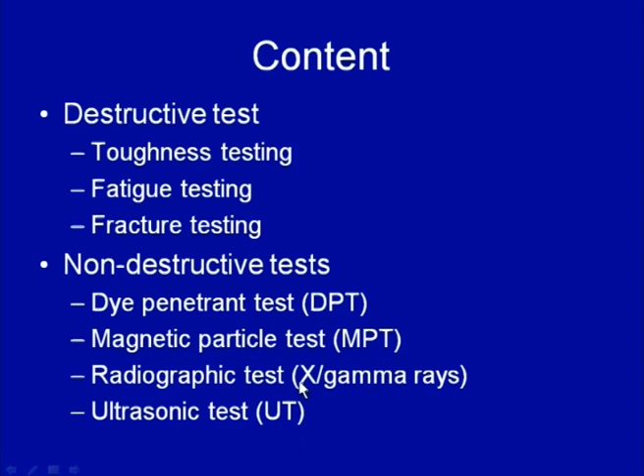Then we will take up the non-destructive testing methods, which will include dye penetrant test, commonly known as DPT, then magnetic particle test known as MPT, and radiographic test based on either X-rays or gamma rays, and then ultrasonic tests. This is one of the very commonly used tests nowadays for assessing the presence of subsurface defects and locating them.

Starting with the toughness test: engineering components are frequently designed with a variety of features like holes, keyways, slots, etc., and these components are expected to perform during service with these features present.

However, presence of special features like notches, keyways, or holes brings in very rapid changes in cross section, which increases stress concentration, and many times under dynamic load conditions these become points of weakness, sometimes leading to failure of the component during service.

Since in actual practice engineering components many times have a variety of notches, and are frequently subjected to dynamic loads, meaning loads whose magnitude is fluctuating, or subjected to a very high rate of loading during service.

To withstand this, a material should have a reasonably good degree of toughness, so that it can withstand service even under high rates of loading conditions, when the component has a variety of notches or variation in cross sections.

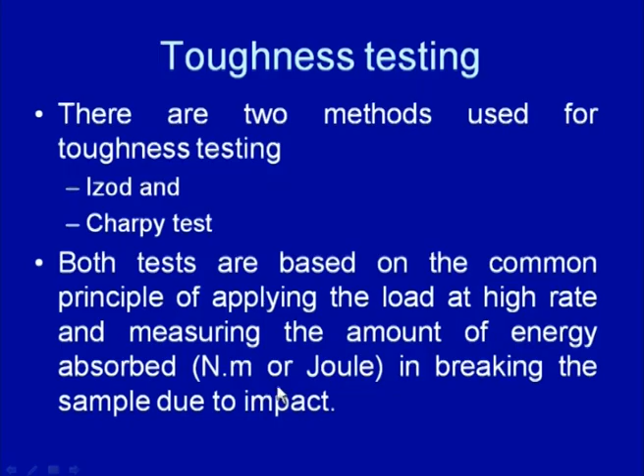Because engineering components are frequently subjected to impact load conditions during service, there are two methods commonly used for toughness testing: IZOD and Charpy test. Both are based on the common principle of applying the load at a high rate and measuring the amount of energy absorbed for breaking the sample due to the impact. So basically the impact load is applied and it is observed how much energy the sample absorbs for fracture to take place.

That energy is expressed either in terms of joule or Newton meter. For this purpose, one common principle is used: a pendulum with a heavy hammer-like object is raised to a high level so that it has potential energy, and then it is dropped under gravity conditions. It hits the sample, and the energy is absorbed by the sample in this fracture process. The amount of energy left with the pendulum as it swings to the other side decides how much height it will cover.

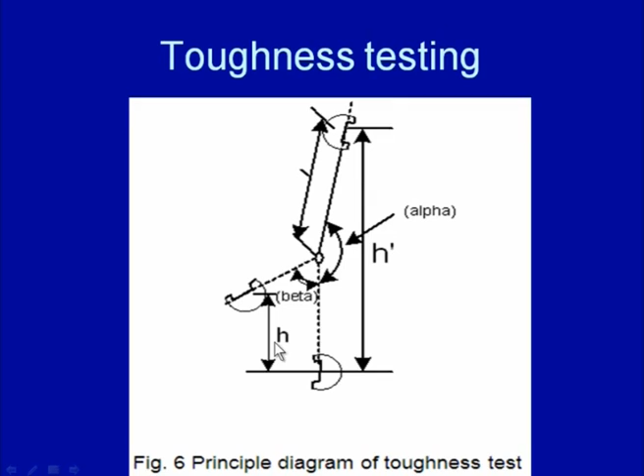Say initially the height of this pendulum is h dash, and when it comes down and hits the specimen, some amount of energy is absorbed. Whatever energy is left with it, the pendulum goes to the other side, say to a height of h. The height difference indicates the amount of energy it has absorbed in this fracture process.

So these two methods, IZOD and Charpy impact test, largely use the same principle: a pendulum is raised to a higher level and then allowed to fall and strike the specimen to be tested, and the amount of energy absorbed in this fracture process is recorded to determine the toughness of the material.

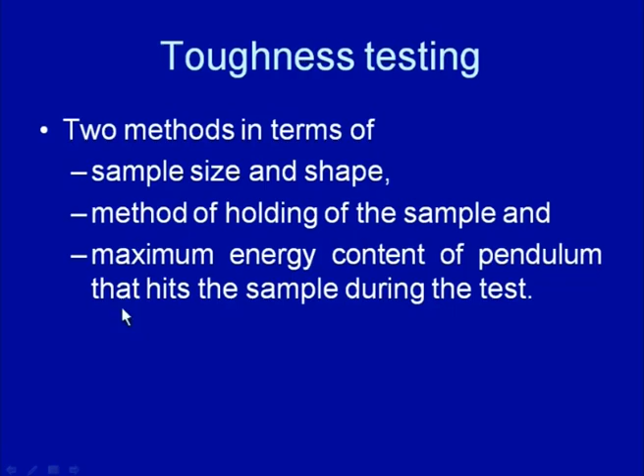However, the placement of the specimen, the type of specimen, and the energy that the pendulum has are different for the two methods. So the two methods differ in terms of sample size and shape, the method of holding the sample, and the amount of energy that the pendulum contains before impacting the specimen.

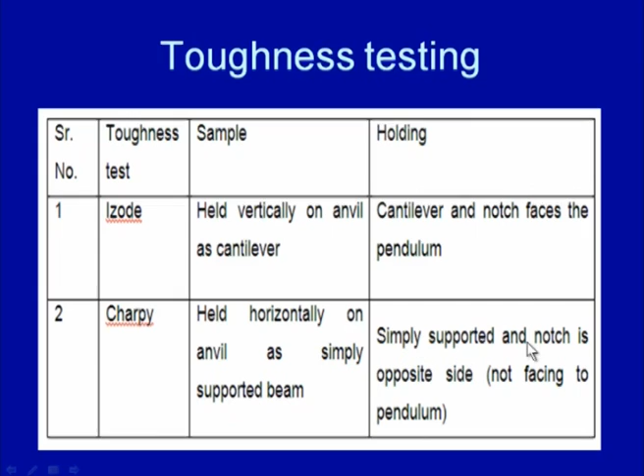In the IZOD test, the specimen is held vertically in a cantilever manner, while in the Charpy test, the specimen is held horizontally on the anvil as a simply supported beam. In the IZOD test, the cantilever and the notch face the pendulum when it hits the surface. In the Charpy test, with the specimen simply supported, the notch is on the opposite side, meaning the pendulum hits the specimen from the back side of the notch, not from the facing side.

This is the difference that exists between these two methods. Just to show this, the schematic of the two specimens and their dimensions is shown here. The first shows the Charpy test, where the specimen to be tested is placed on the anvil in a simply supported manner, getting support from both ends, and then the pendulum's striking edge hits from the back side, and the amount of energy absorbed is recorded in this test.

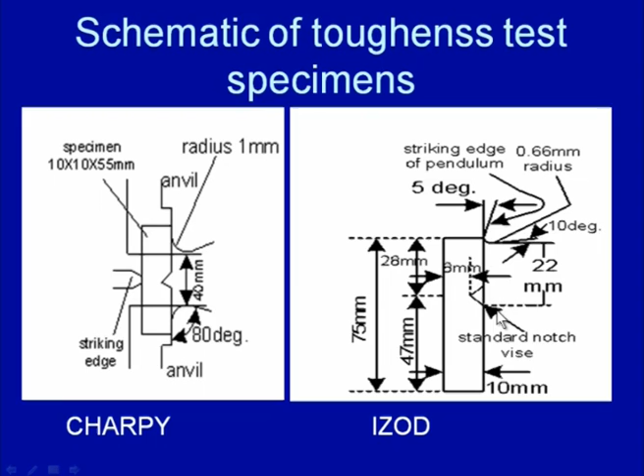In the IZOD test, the specimen is held like a cantilever, and the pendulum hits from the face side of the notch. These are the different dimensions of the specimen commonly used for the IZOD test.

In both cases, we find the toughness of the material in terms of the energy absorbed by the notched material, measured in Newton meter or joule. Higher the amount of energy absorbed in this fracture process, greater is the toughness of the material, indicating that the material can withstand impact load conditions without failure.

If the material requires very less amount of energy for fracture to take place, that indicates the lower toughness of the material and poor ability of the material to withstand impact load conditions.

Once the impact toughness test is completed, the results are reported in terms of the amount of energy absorbed by the specimen in this process, or amount of energy absorbed per unit cross sectional area.

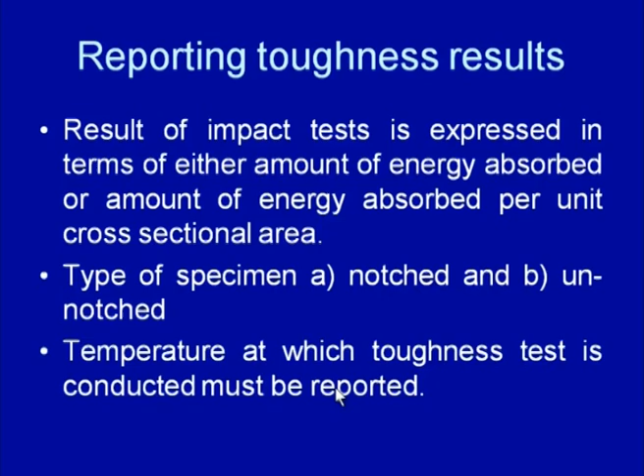It is also mentioned what type of specimen was used, whether notched or unnotched, and the temperature at which the toughness test was conducted, because temperature significantly affects the toughness value of the material. It is also important to mention which method of test was used, whether Izod or the Charpy test.

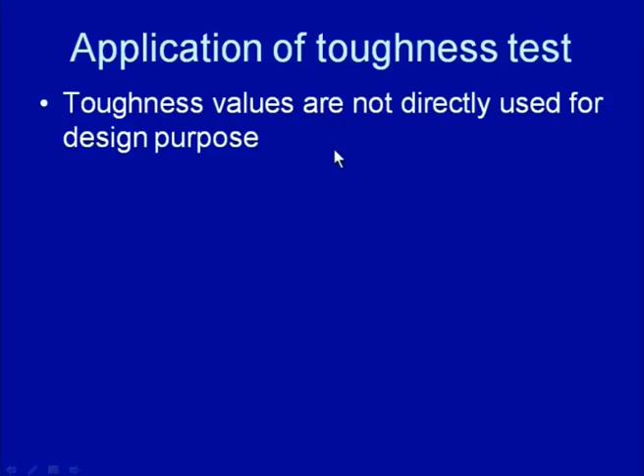After conducting the test, we get some value of toughness in terms of the energy absorbed by the specimen during the test, but these values are not used directly for any design purpose. They simply indicate the ability of the material to withstand impact load conditions.

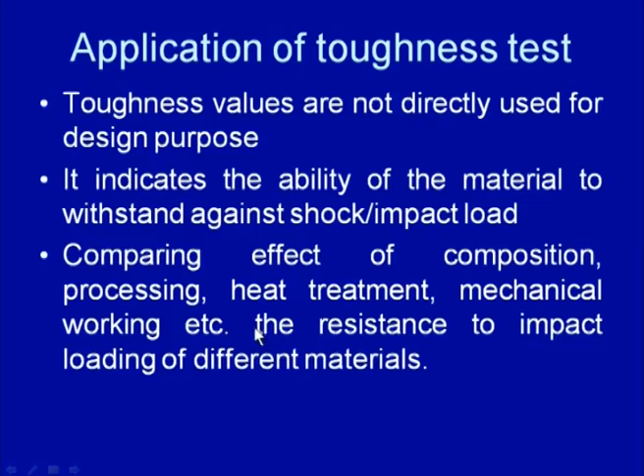This test can be effectively used to see how variation in composition, processing method, heat treatment, or mechanical working affects the ability to withstand different impact load conditions. So this toughness test can be used to compare how the material's ability to withstand impact load is affected by changes in composition, processing, heat treatment, or mechanical working.

Another important test is the fatigue test. In real life, most engineering components are subjected to fatigue, because the magnitude of the load and its direction keeps changing during service.

The application of fatigue load on an engineering component reduces its life very drastically. To assess how a material or weld joint will perform under such load conditions, fatigue behavior is investigated, and it is studied in two ways.

First, to identify the endurance limit, meaning the maximum stress at which it can withstand an infinite life, typically more than 2 million load cycles.

So the first fatigue test is conducted mainly to see the endurance limit, which indicates the maximum stress at which it can withstand an infinite life, mostly considered as 2 million load cycles, or alternatively, the number of load cycles it will withstand.

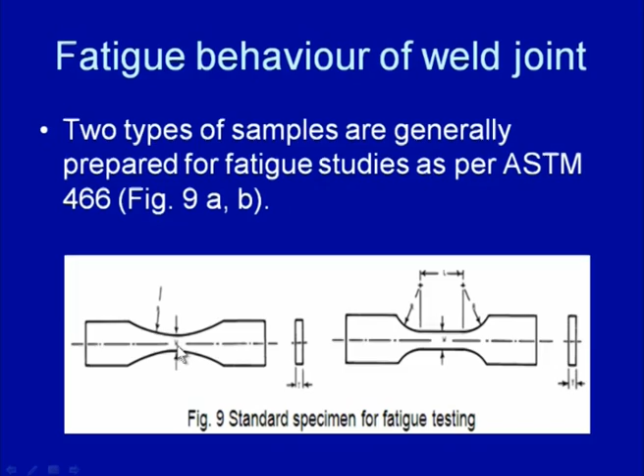In the reducing radius cross section specimen, the stresses are always localized in the minimum cross sectional area zone, and this is mostly kept in the weld region, which helps assess the fatigue performance of the weld joint itself.

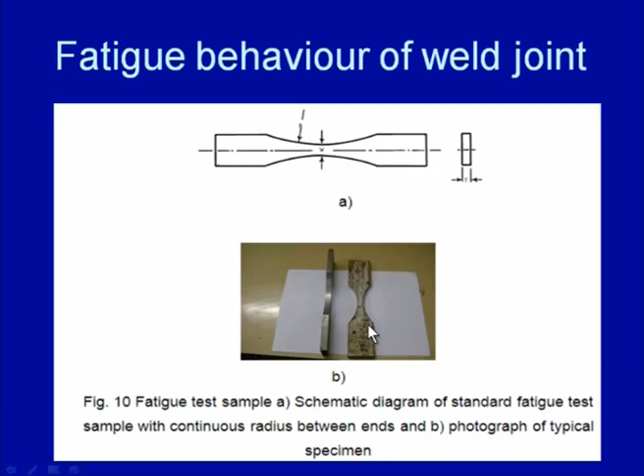These are the typical specimens used for conducting the fatigue test. Here is a schematic diagram showing the reduced radius specimen, and this is a real photograph showing the reduced radius specimen used for fatigue testing.

When the fatigue test is conducted, it is important to see what loading conditions are being used, since the fatigue performance is appreciably influenced by the various parameters related to this test.

First, we see what stress ratio is being applied, meaning what is the minimum and maximum stress. The ratio of the minimum to maximum stress gives us the stress ratio, and the commonly used stress ratios are 0.1 or 0.5.

Then the type of stress being used is established, meaning what type of stress load cycle is developed for conducting the test. It could be tension to tension, where stress varies from some minimum tensile value to a higher value, or it could be reverse bending, tension to compression, or zero to tension.

Then the maximum stress magnitude is identified, and stress range is identified from the difference of maximum to minimum stresses. The rate at which load is applied is indicated as loading frequency. Depending on the system being used, we can use loading frequencies of 5 hertz, 10 hertz, or 20 hertz, based on the capability of the test system.

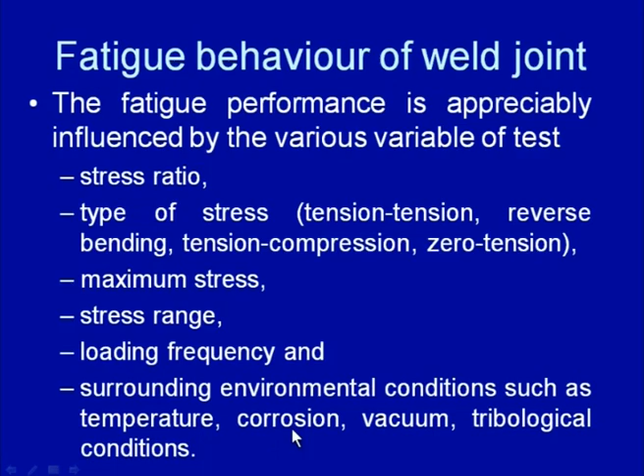If any special kind of environment is applied for conducting the test, such as low or high temperature, corrosive atmosphere, vacuum, or tribological conditions like fatigue under fretting, abrasion, erosion, or cavitation conditions, then depending on the conditions required, a suitable environment is developed and reported.

For conducting the fatigue test, suitable stresses are developed and applied onto the specimen as per requirement. It is common to conduct a rotary bending test, which develops tensile and compressive stresses in each load cycle, while axial stresses are also used, applying either zero to tension or tension to tension stresses.

Apart from the rotary test, axial loading is commonly used for conducting the fatigue test. For axial loading, we first conduct the tensile test of the specimen so that we know the yield strength and ultimate strength of the material.

To understand this, we will go through the step-by-step methodology. Say we have a weld joint for which this is the weld joint specimen, a tensile specimen that has been developed, and at the center, here, this is the weld region.

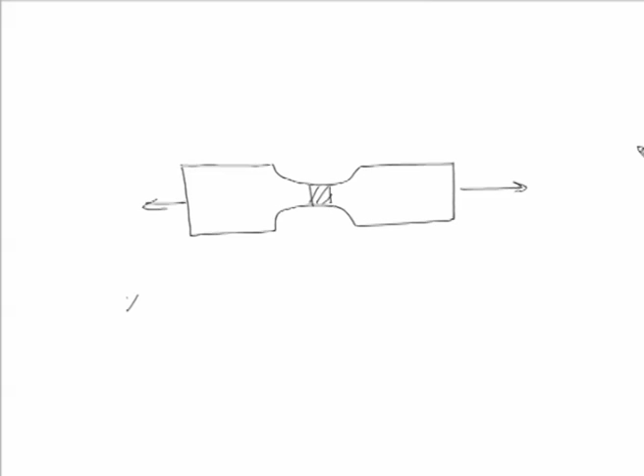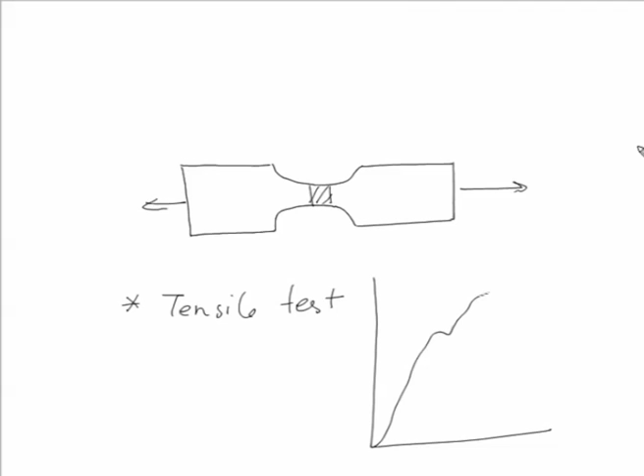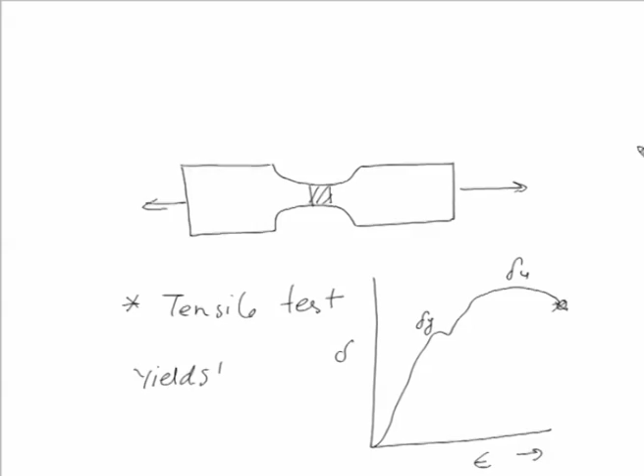The first step is to conduct the tensile test of the specimen. When the tensile test is conducted, it gives us a stress-strain curve of this kind, which gives us the yield stress, ultimate stress, and the percentage elongation corresponding to this point. This yield stress information is used for conducting the fatigue test.

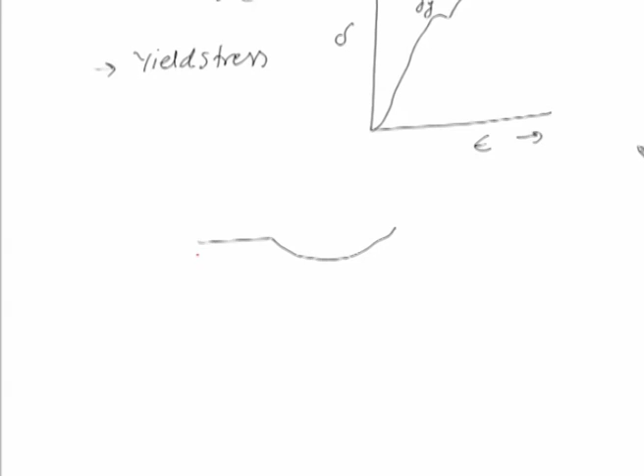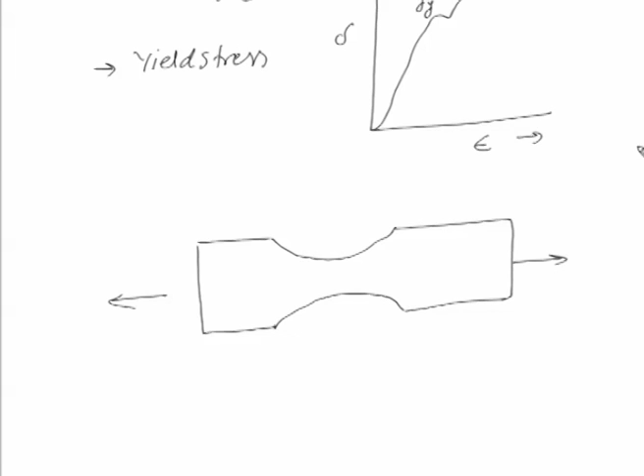Another specimen, with a reduced radius cross section, will be developed and subjected to the fatigue test, say in the case of axial loading, depending on the kind of stresses to be developed, ranging from zero to some maximum, or some minimum to maximum.

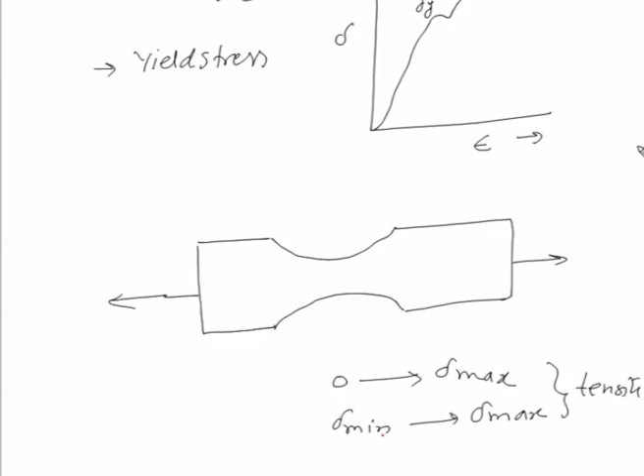So all these can be of tensile kind, or these can have minimum compressive stress and maximum tensile stress, and their values can be identified. This is how we identify the kind of stress and the maximum stress to be applied, and based on this we apply the loading conditions.

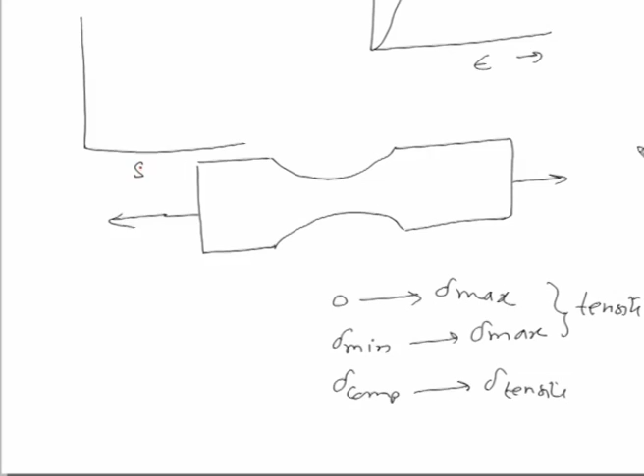As far as development of the S-N curve is concerned, we need to plot the relationship between the number of load cycles a specimen can withstand, and here we can have either maximum stress or stress amplitude. It is common to use S for stress amplitude, which is half of the stress range.

We start by putting in maximum stress to the tune of 0.9 times the yield stress. So starting with this, 0.9 maximum stress corresponds to 0.9 times the yield stress, and that will be taken as the first test. This will consume, or use, very few load cycles.

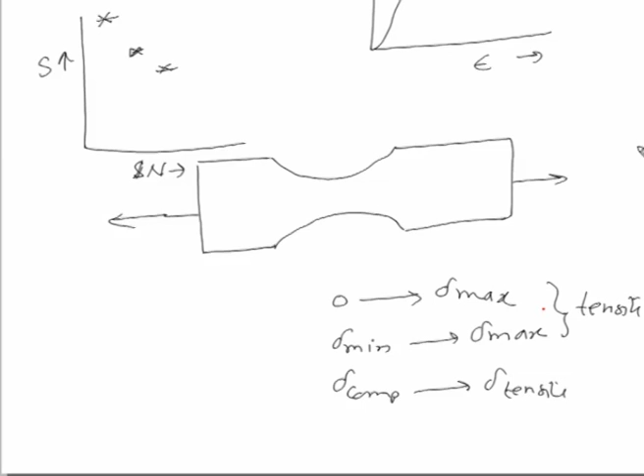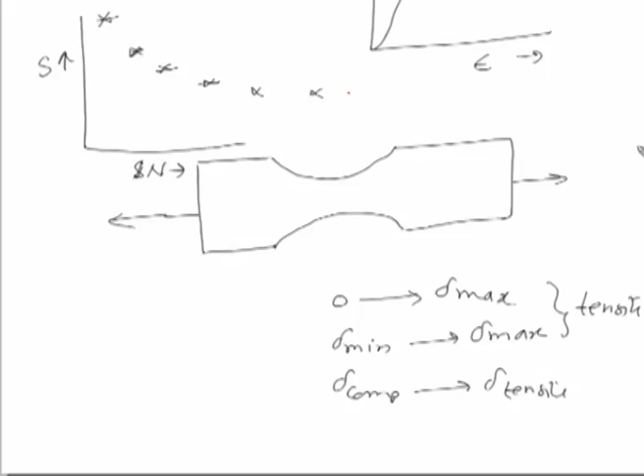Thereafter, we will be conducting the test at 0.8 times of the yield stress, which will take somewhat longer, and we keep on reducing further to 0.7 times of the yield strength, then 0.6 times of the yield stress, and so on. We find that after reaching somewhere in the band of 0.4 to 0.5 times of the yield stress, in case of ferrous metals, the number of load cycles becomes the endurance limit. So we can show it like this.

The first test is conducted corresponding to 0.9 times the maximum stress, which should be about 0.9 times of the yield strength, and thereafter depending upon the kind of stress ratio being used. A stress ratio can be 0.1 or 0.5.

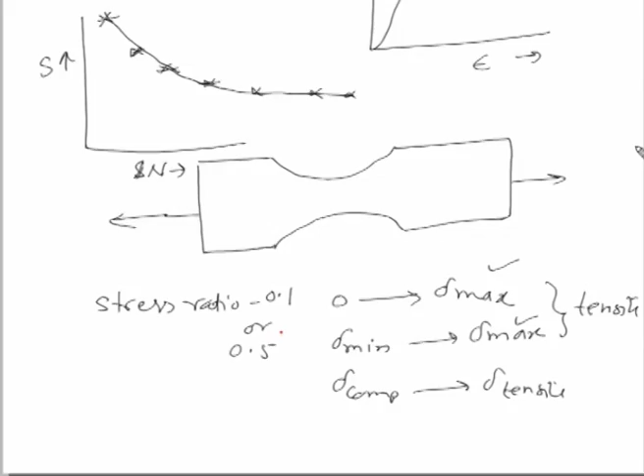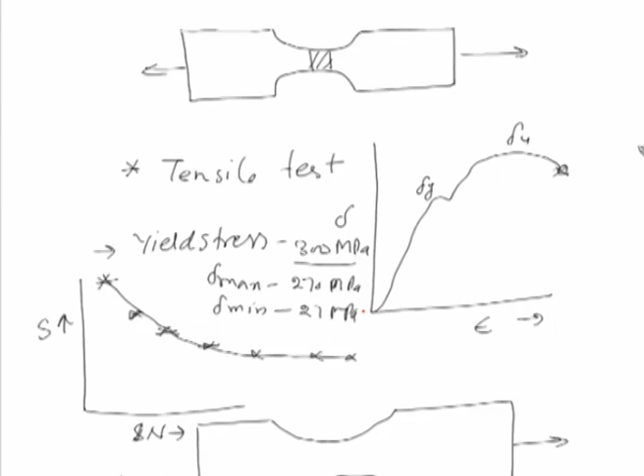If you are taking a stress ratio of 0.1, it indicates that the maximum stress will be about 10 times the minimum stress. Say if the yield strength comes out to be 300 MPa, then to start with, the sigma max we can take as 270 MPa, and sigma minimum using the stress ratio will be 27 MPa. So if it is tension to tension, the minimum stress will be 27 MPa, maximum stress will be 270 MPa, and accordingly the stress range can be calculated. This is one way which can be used for conducting the fatigue test.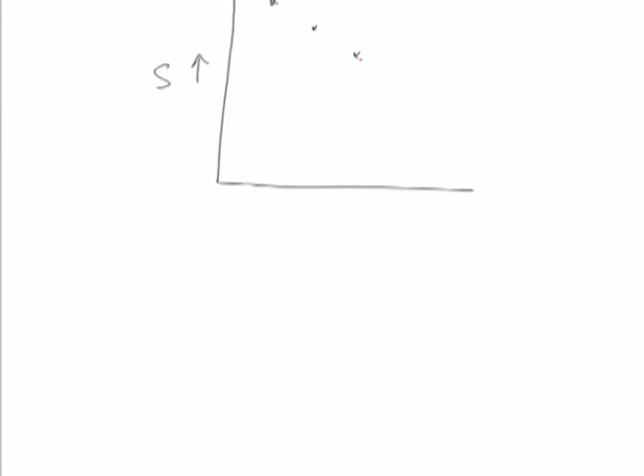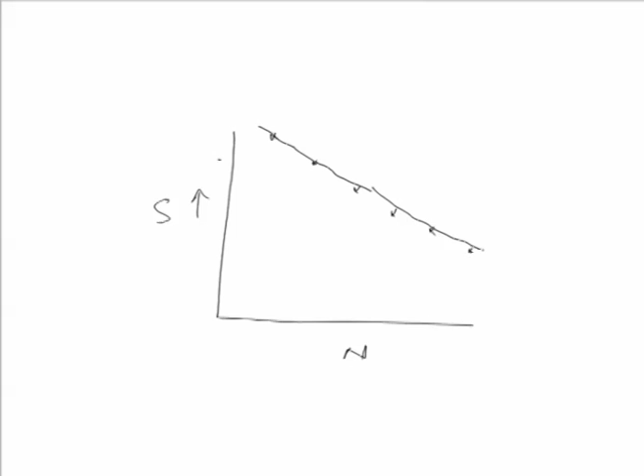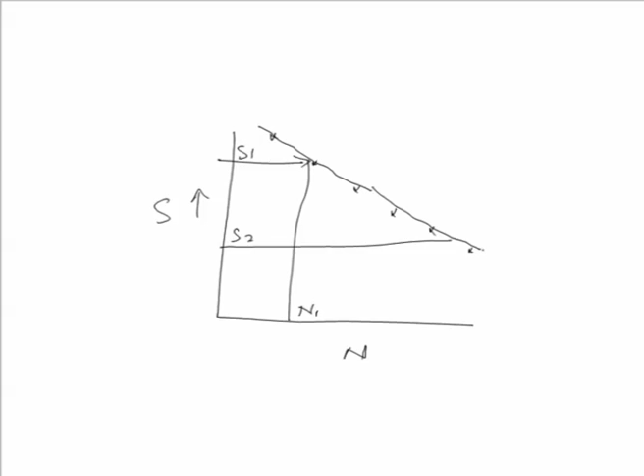There is another way, when the material is a non-ferrous metal system like aluminum, where we will not get a clear cut endurance limit. For conducting tests on those metal systems, we correspond to different stress amplitudes and conduct the fatigue test, and in that case we keep on continuously decreasing the fatigue load cycles without getting a very specific and clear cut endurance limit. So for a given stress amplitude value we get one value of life - for S1 stress amplitude we get N1 life, and if S2 is the stress amplitude then we get another N2 life of the component under fatigue conditions.

So these are the two ways through which the fatigue behavior of the material is studied, especially with respect to life. One is the endurance limit, the other is the number of load cycles a system will withstand for given loading conditions.

Another important aspect related to fatigue behavior is the study of crack growth rate. We know that fatigue failure takes place in three stages: crack nucleation, crack growth, and catastrophic failure. The first and last stages - nucleation and catastrophic failure - form about 15 to 20% of the total fatigue life cycle, while 80% of the fatigue life is composed of the second stage, where stable crack growth takes place.

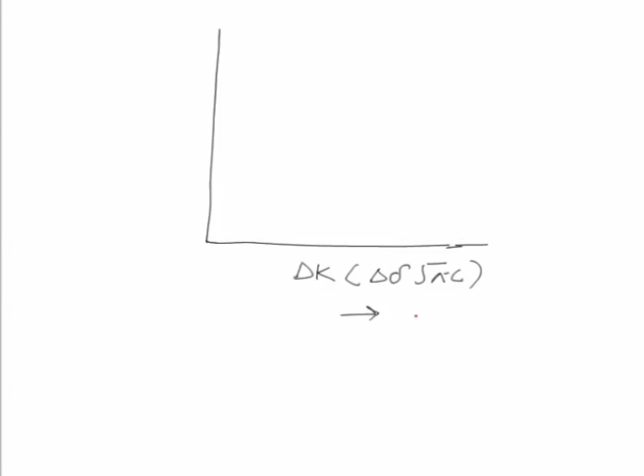So basically we try to study the crack growth behavior of the material under fatigue conditions. To study the fatigue crack growth rate, we use delta K, the stress intensity factor range, indicating the stress range - that is delta sigma, the difference of maximum stress and minimum stress - multiplied by root pi C. This gives us the stress intensity factor range, where C is the half crack length for internal defects, and the full crack length for external discontinuities and defects.

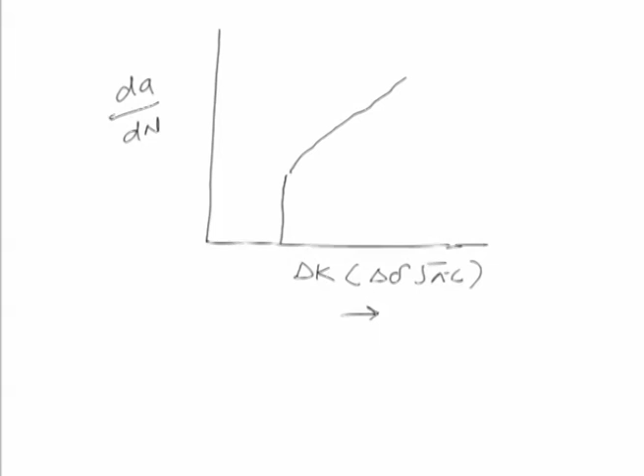The stress intensity factor range is put on the x axis, and on the y axis we put da by dN, which indicates the crack growth rate. We get a curve where there is no crack growth rate - the crack, even if present, is non-propagating - and when the stress range increases beyond a certain value, we get a curve where very stable, smooth crack growth occurs.

The crack growth rate increases continuously, and then in the third stage it increases further. So this is the first stage, and this is the second stage, where the crack growth rate versus the stress intensity factor range has a largely linear relationship. In the third stage, the crack growth rate increases at an increasing rate, clear from its positive slope, while in the second stage the slope largely remains constant.

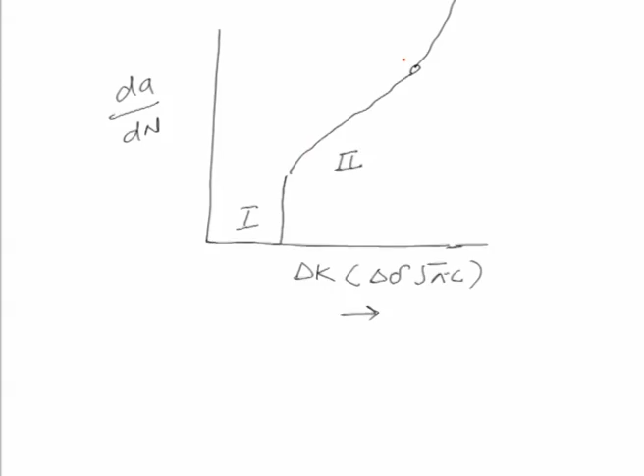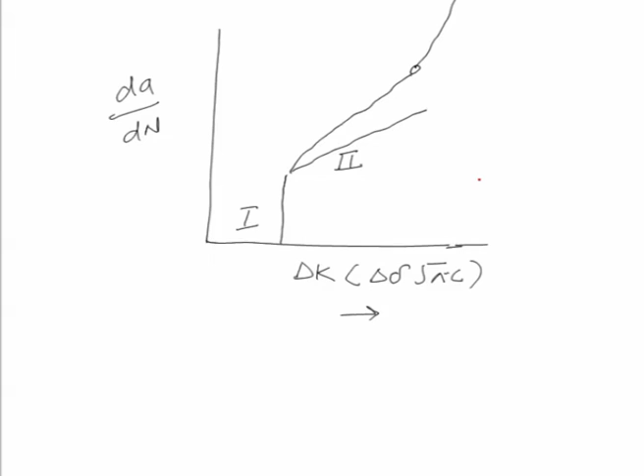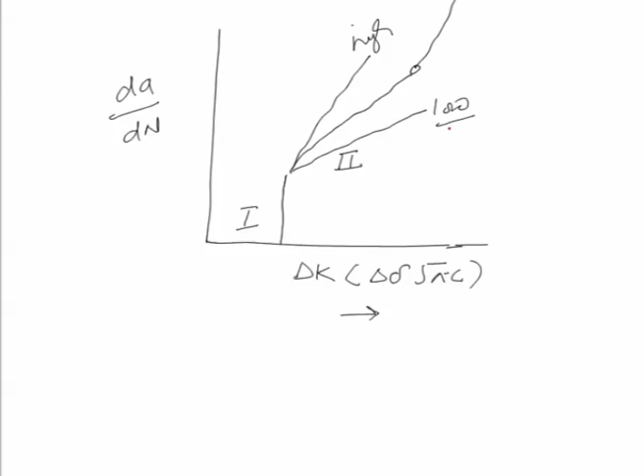For different metal systems, this slope is found at different angles. For metal systems where the slope is low, the crack growth rate occurs slowly and the fatigue performance will be better compared to material systems showing higher crack growth rate. So here this is low crack growth rate, and this is high crack growth rate, and high crack growth rate materials show poor performance under fatigue load conditions.

This is another zone where fatigue crack growth related studies are conducted. As far as fatigue behavior is concerned, the important aspects include plotting the S-N curve, meaning stress amplitude, maximum stress or stress range, versus the number of load cycles, called the S-N curve.

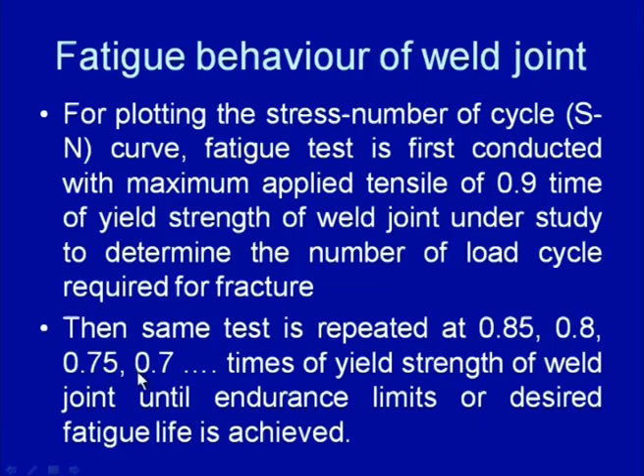The fatigue test is first conducted with the maximum applied tensile stress of 0.9 times the yield strength of the weld joint under study, to determine the number of load cycles required for fracture. The same test is then repeated at 0.85, 0.8, 0.75, 0.7, 0.65, and so on at different maximum stress levels, and the number of load cycles required for failure is identified.

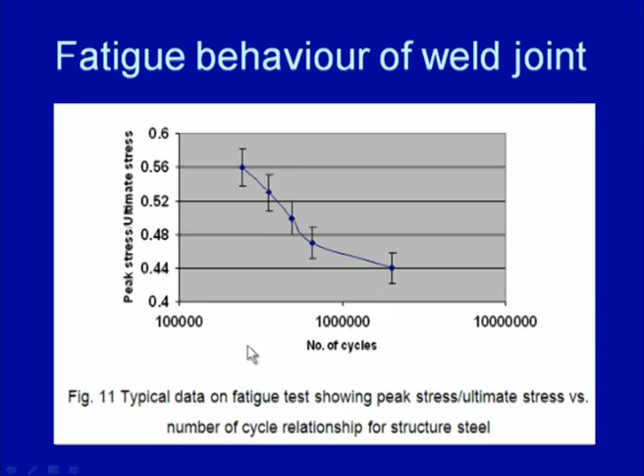We then develop a plot between stress range, stress amplitude or maximum stress on the y-axis and the number of load cycles on the x-axis to obtain the S-N curve. These S-N curves can be plotted on linear scales or log scales.

The fracture toughness test is another important test commonly used for measuring the resistance to fracture of the material. It indirectly shows that if a crack is present, under what conditions it will start growing. So the resistance to crack growth is measured in terms of fracture toughness, which shows resistance to fracture or resistance to crack growth. This is known as fracture toughness.

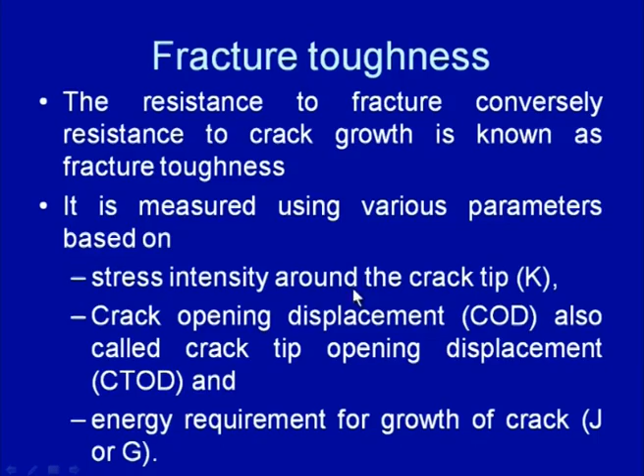It is measured using various approaches like the stress intensity factor around the crack tip, commonly known as the stress intensity factor and denoted by K. Then there is the crack opening displacement, called COD or CTOD (crack tip opening displacement), and the energy required for growth of the crack, using the J or G parameters.

We will be talking mainly about the stress intensity factor parameter, which is used for plane strain conditions, especially when the yield strength of the material is high and ductility is very limited, while the crack opening displacement and energy-related parameters are used for somewhat ductile materials.

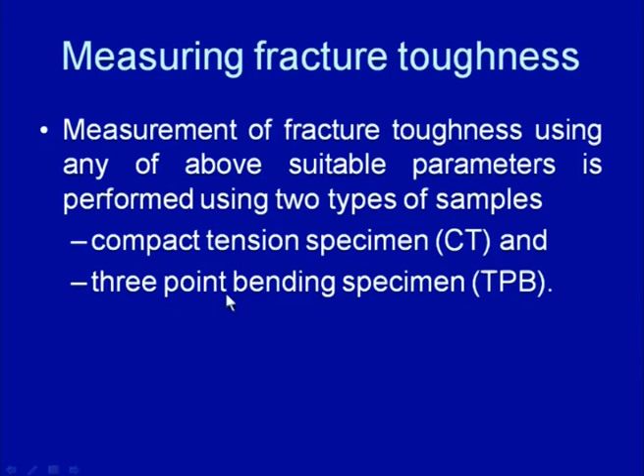For measurement of fracture toughness, two types of specimens are used. One is called the compact tension specimen, commonly known as the CT specimen, and the other is the 3-point bending specimen, abbreviated as TPB.

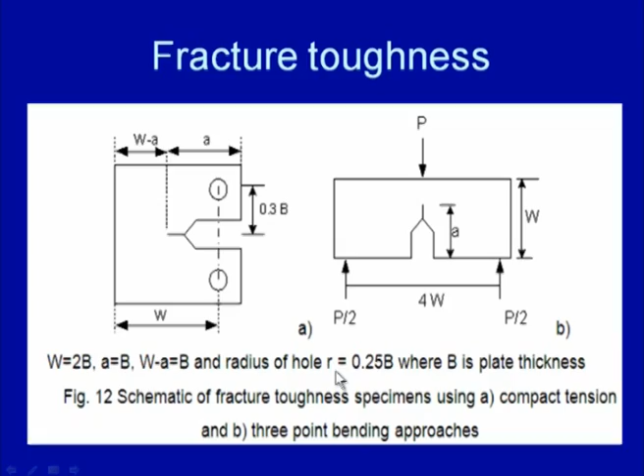In case of the 3-point bending specimen, the specimen is simply supported and the bending load is applied from the top like this, and this hole which is made is about 0.25 times the plate thickness.

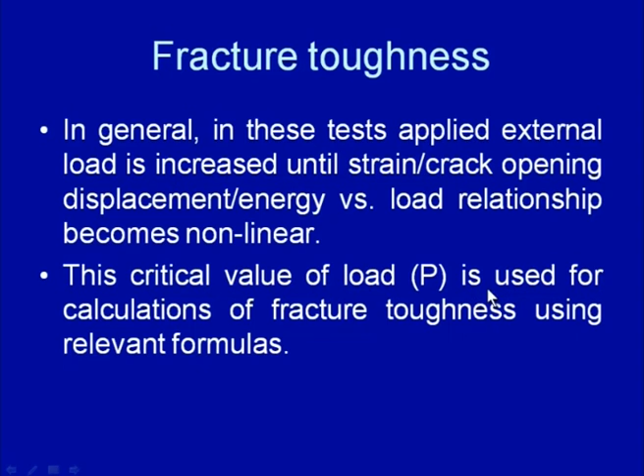In general, these tests are conducted by applying external load, and it is increased until the strain, crack opening displacement, or energy versus load relationship becomes non-linear. That critical value of load where it deviates from linearity is used for calculation of fracture toughness using the relevant formulas.

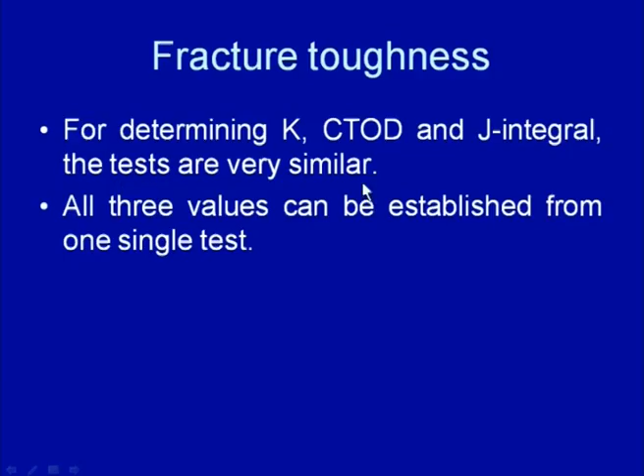For determining K CTOD (crack tip opening displacement), stress intensity factor, and J integral, the tests are very similar, and all three values can be established from a single test. To check whether they are valid, separate calculations are made. For example, K1C is used for estimation of the critical stress applied to the specimen with a given crack length.

So if we know the crack length and have identified the critical stress intensity factor, we can identify the critical stress required for catastrophic failure of the component. This can be used if K1C is the material parameter and we know the crack length, then we can assess the critical stress required for propagation of the crack.

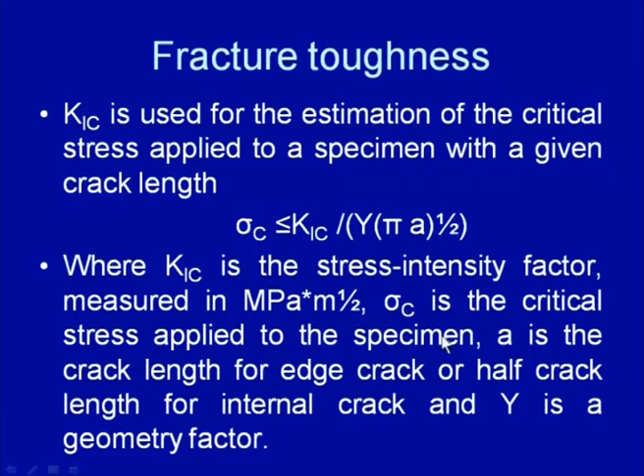Here K1C is the critical stress intensity factor, measured in MPa times square root of meter, and sigma c is the critical stress applied to the specimen. A is the crack length for the edge crack, or half crack length for the internal crack, and Y is the geometric factor. For valid K1C results, the specimen dimensions should have plane strain conditions and satisfy the following criteria.

This is the kind of criteria which should be satisfied: the thickness of the plate, and W minus A, should be greater than 2.5 times K1C divided by the yield strength of the material, sigma ys, whole squared.

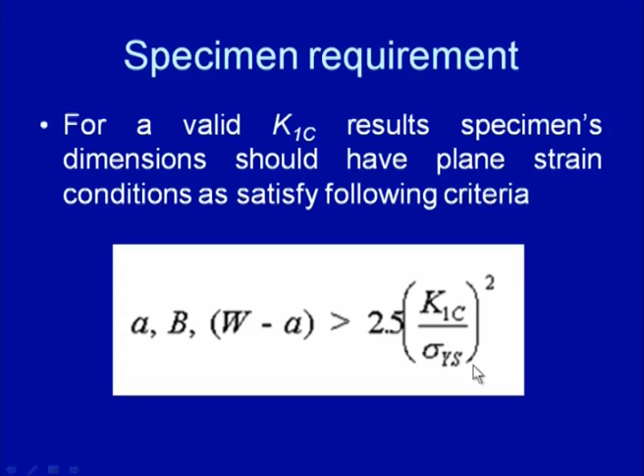Before applying the external load for conducting the fracture toughness test, after machining, a crack is developed by pre-cracking, and fatigue load is applied for this. Certain conditions must be kept in mind for pre-cracking, like the crack length must be in the range of 0.45 to 0.55 of the value of A by W.

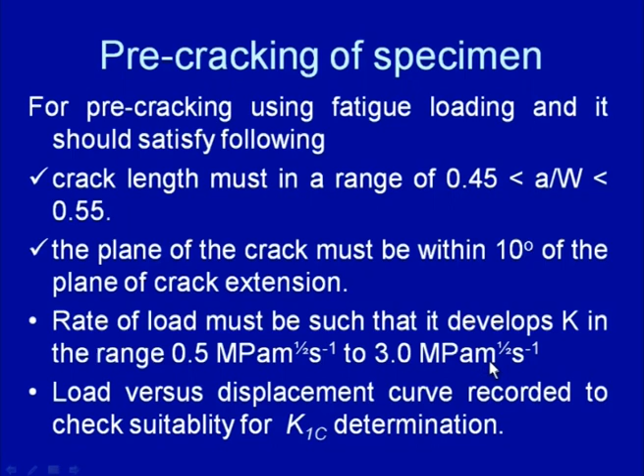A is the crack length, and we have already defined A and W parameters. The plane of the crack must be within 10 degrees of the plane of crack extension, and the rate of loading must be such that it develops K, the stress intensity factor, in the range of 0.5 MPa times square root of meter per second to 3 MPa times square root of meter per second.

So the load versus displacement curve is recorded to check the suitability for determination of K1C.

When this test is conducted, we get the load-displacement curve. In this curve, on the y axis, especially for metal systems with plane strain conditions, we find the load, and on the x axis we have displacement or load extension. The load increases linearly, and for metal systems where plane strain conditions are developed, it deviates directly.

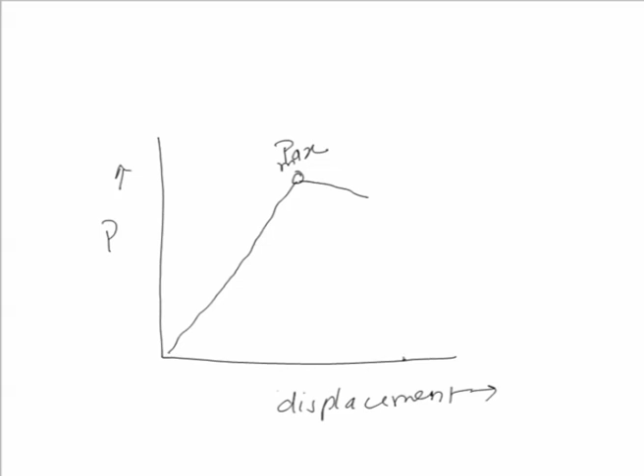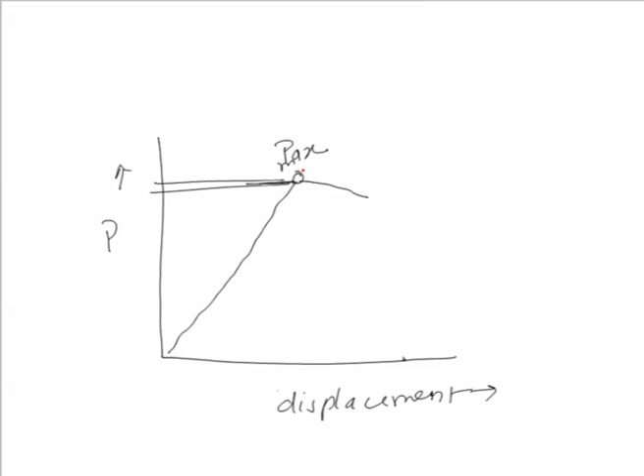This load, corresponding to P max, is the value of the maximum load at which the load versus displacement relationship for the CT specimen remains linear. This value of maximum load at which the two have a linear relationship is used for calculating the fracture toughness of the material.

This fracture toughness is calculated using this equation, where PQ corresponds to the maximum value of the load up to which the metal system has a linear relationship between load and displacement. The main parameters are T, the thickness, W as already defined, PQ the maximum load up to the linear relationship, and alpha, the ratio of A by W, which is the non-dimensional crack length.

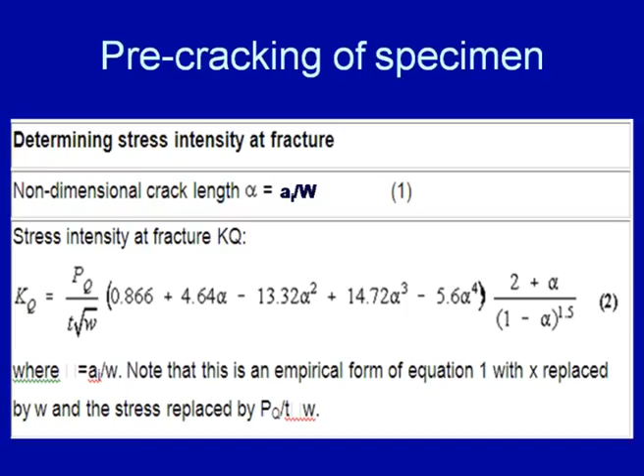Now we will be talking about destructive tests and non-destructive tests. Non-destructive tests are those commonly carried out to assess the soundness of weld joints, because weld joints frequently carry various types of discontinuities.

To check whether the weld joint is sound or free from defects, a variety of non-destructive tests are conducted. Even the final weld joints developed in a component for final use are subjected to non-destructive tests, because destructive tests cannot be conducted on those specimens as they would be damaged. The various types of non-destructive tests available include the dye penetrant test, magnetic particle test, radiographic test, and ultrasonic test. We also have other tests like eddy current test, but in this presentation we will talk about the first four kinds.

Some of these tests are used only for surface defects, to assess the presence of surface defects, while others are used for both surface as well as subsurface defects.

Dye penetrant test is one of the commonly used non-destructive tests, which is used for assessing the presence of surface defects and discontinuities, such as cracks and pores in metals and plastics. This test is not used for testing subsurface defects which are present below the surface, so it is mainly used for assessing surface discontinuities.

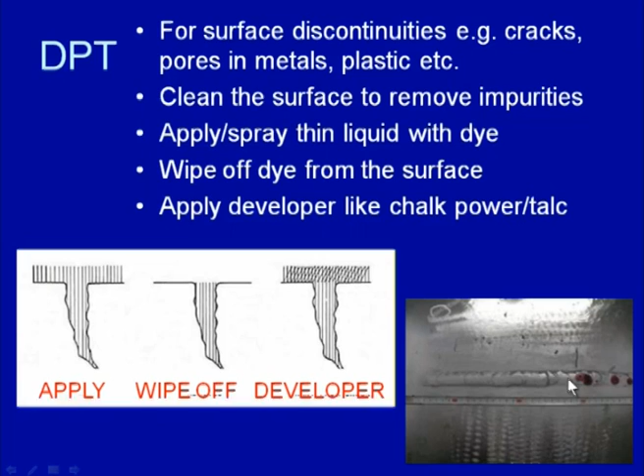When this thin liquid is applied, it is sucked by capillary action inside the defects present at the surface. After wiping it off, a developer, like chalk powder or talc, is applied so that it sucks the liquid from those fine discontinuities present at the surface, developing some sort of stain zone in the weld joint, indicating the presence of discontinuities at the surface. If no defect is present, then on removal of the liquid, all of it will be removed, and on application of the developer, no stains will develop.

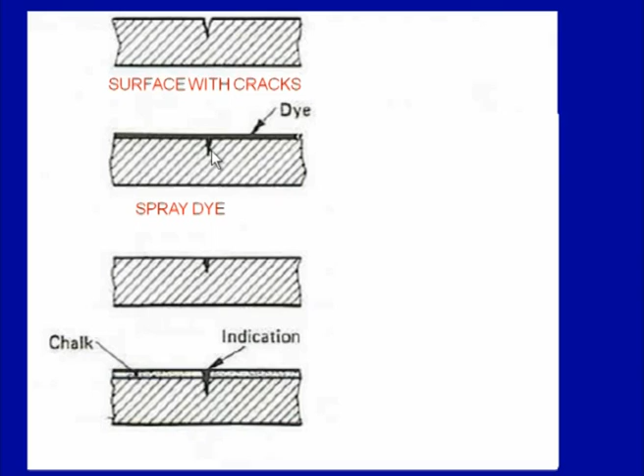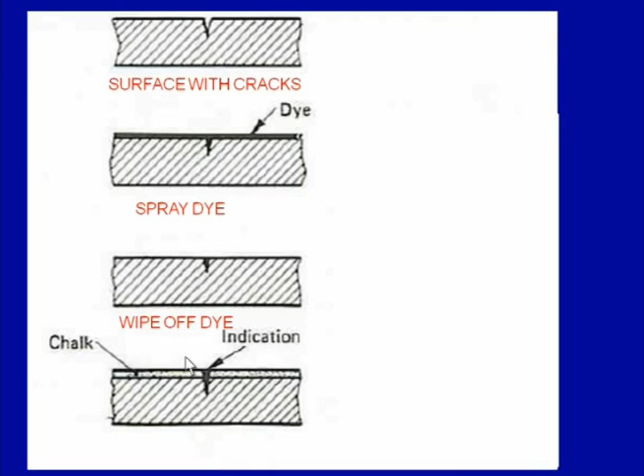So here, say the surface has some sort of defect, a crack. When the dye is applied, the liquid is sucked inside the defect on spraying, and then that liquid is wiped off. But the liquid which was sucked inside the defect remains there, and on application of the developer like chalk powder, stains will appear in the chalk powder, showing the presence of the defect.

In this test, the component to be tested is magnetized in such a way that the magnetic field is perpendicular to the discontinuity. Thereafter, magnetic particles like iron oxide are sprinkled over the surface, and based on observing the pattern of powder segregation, it will indicate or suggest the size and type of discontinuity present.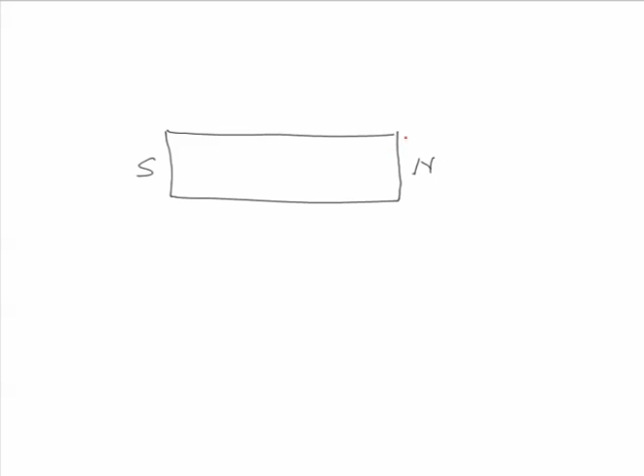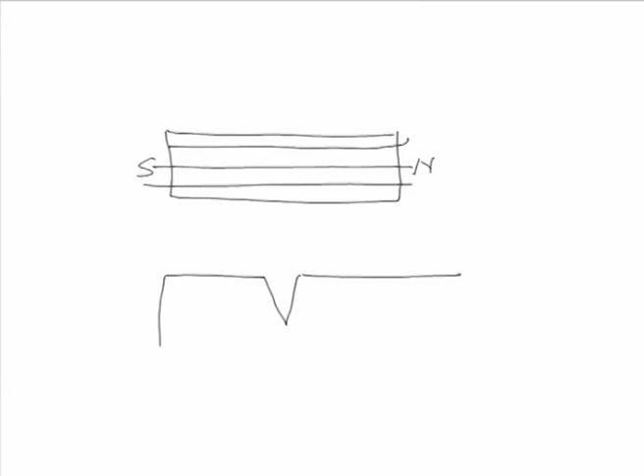This magnetic particle test works on the simple principle that a typical magnet has north and south poles, and the magnetic lines pass through smoothly. However, if there is some sort of defect in the component, then in addition to these two poles, wherever discontinuities are present, leakage of the magnetic flux starts.

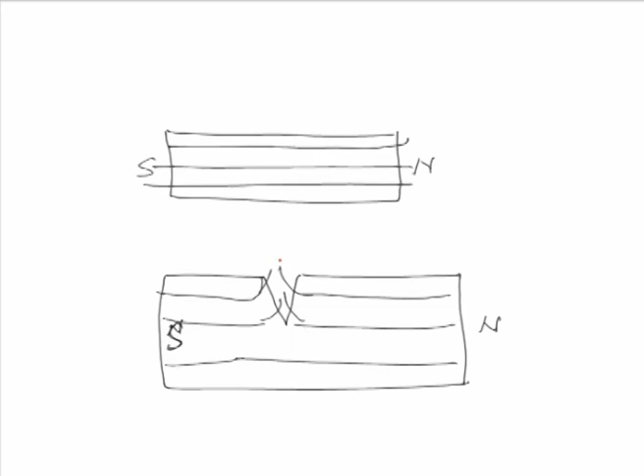This leakage will take place wherever discontinuities are present, and it will form fresh poles. So when the powder is sprinkled over the surface, it tends to segregate near the areas where we have discontinuities.

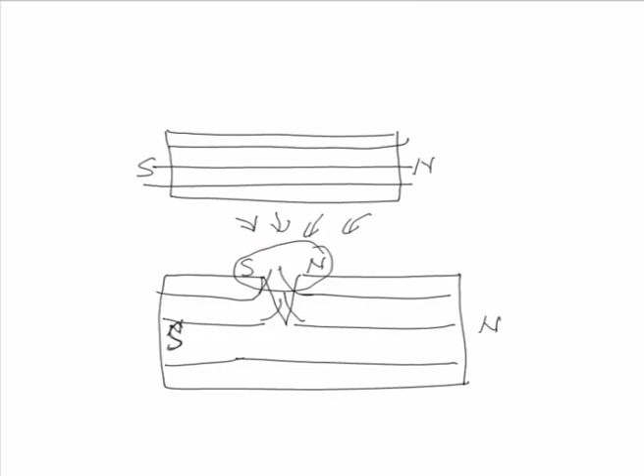If the defect is very clear, powders will tend to segregate in the areas where the defect is present, because the leaking magnetic field will attract the powder particles and segregate them in a particular pattern. So wherever the defect is present, say along this line, the powder particles will tend to cluster and segregate around it.

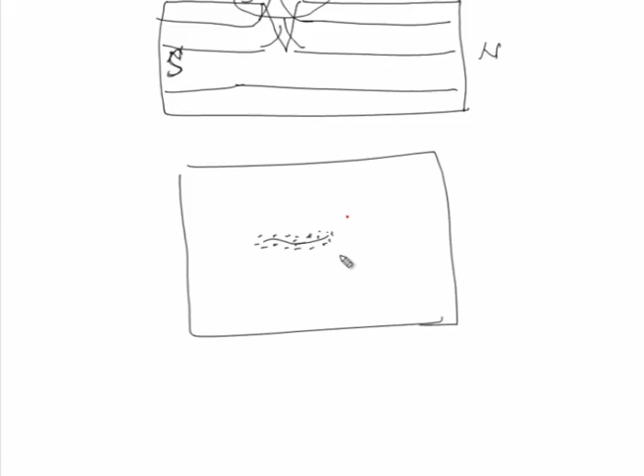If the clustering or segregation of the powder particles is very diffused, that suggests the presence of some internal defect. If it is very clear and sharp, then depending on the length to which the particles have been segregated, or the path on which they have been segregated, that will indicate the location and the size of that defect.

Here this is a normal magnet without any defect, where magnetic lines of force pass from S to N, and the cycle is completing. But when there is a defect in the component, the magnetic lines of force start leaking from the location of the defect, and it forms two additional poles.

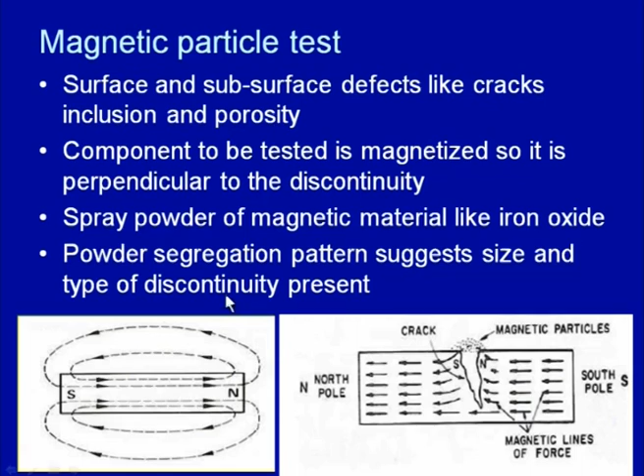When we sprinkle the powder particles, they tend to cluster in the areas where there is a leakage of the magnetic lines of force, and clustering of the powder particles happens there. So by seeing the pattern of segregation of the powder particles and the size of where the segregation is taking place, the size and presence of the discontinuity is established.

We know that when magnetic materials are magnetized, even after removal of the magnetic field they remain magnetized. So they are sometimes intentionally demagnetized to avoid any adverse effect on the performance of the component. Demagnetizing is done intentionally to prevent any adverse effect on the component's performance.

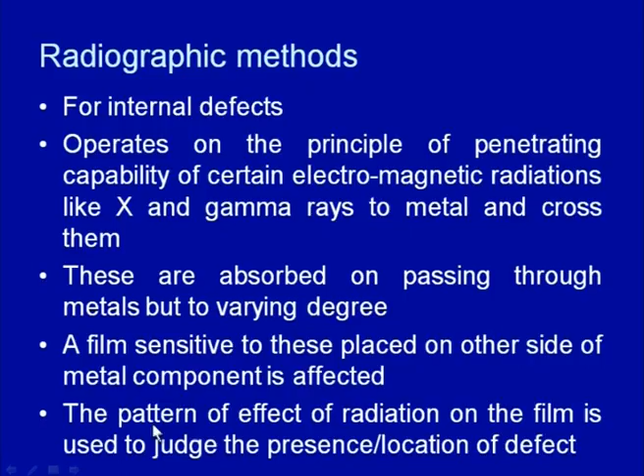Radiographic test is mainly used for internal defects, and it operates on the principle of the penetrating capability of electromagnetic radiations like X-rays and gamma rays through the metals. These are absorbed on passing through the metal to varying degrees, and the film sensitive to these radiations, placed on the other side of the metal component, is affected. The pattern of the effect of the radiation on the film is used to judge the presence and location of the defect.

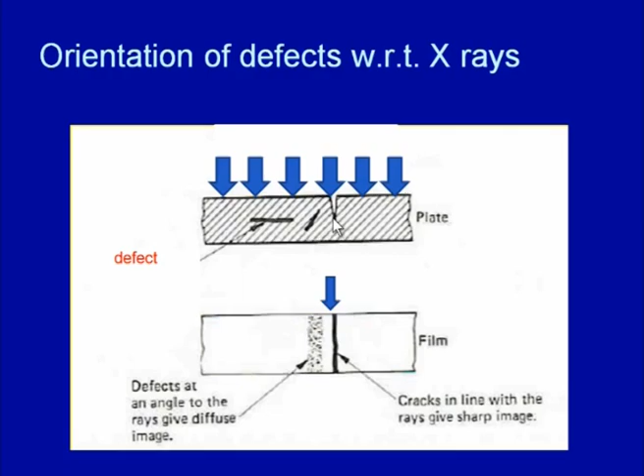Wherever more darkening has taken place, that shows the greater presence of the defect or the larger size of the defect. So we can take radiographs in two different directions in order to locate exactly where the defect is present.

This kind of test can be conducted with exposure given for a few seconds, a few minutes, or a few hours. Gamma ray testing is conducted for longer durations, while X-ray testing requires exposure for only a few seconds. X-rays are more useful for thinner components or thinner sections, while gamma rays are used for heavy sections. We know that all these radiations are very harmful to people.

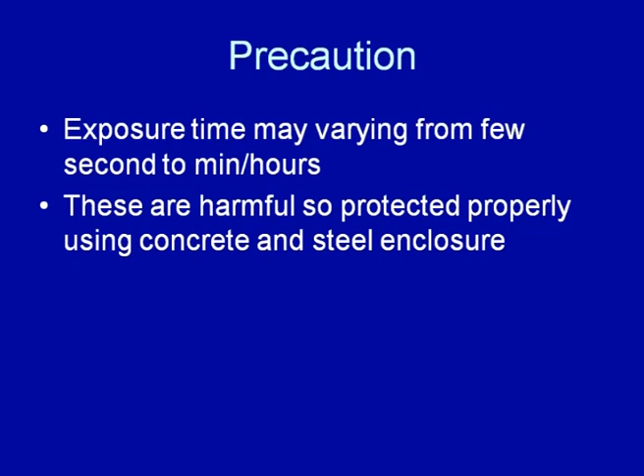So, proper protection must be given, and for this purpose wherever these sources for these radiations exist, they are properly isolated using concrete and steel enclosures, so that they do not leak.

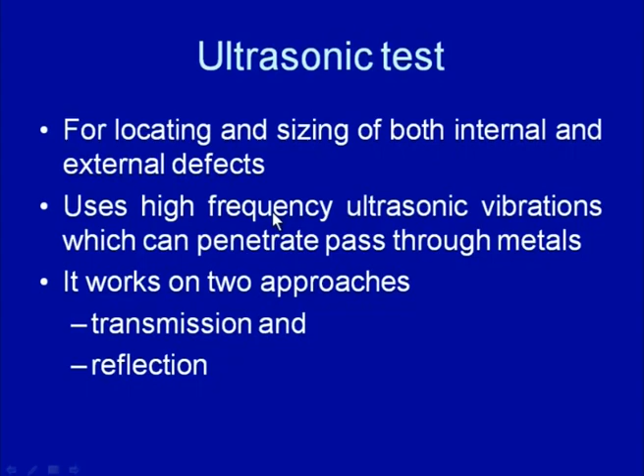Now, the ultrasonic test is another important test commonly used nowadays for assessing internal as well as external defects. It uses high frequency ultrasonic vibrations which can penetrate easily through metals, and it works on two approaches: one is transmission, another is reflection.

In case of transmission, the ultrasonic vibrations are transmitted from one side and received on the other side. If we are able to receive all the radiations, that will indicate that no defect in the metal system is present.

Here we are transmitting and receiving on both sides, and these are observed in the oscilloscope. Continuous presence of these vibrations indicates the presence of no defect, but when it comes across a discontinuity like this, these are being transmitted but not received on the other side.

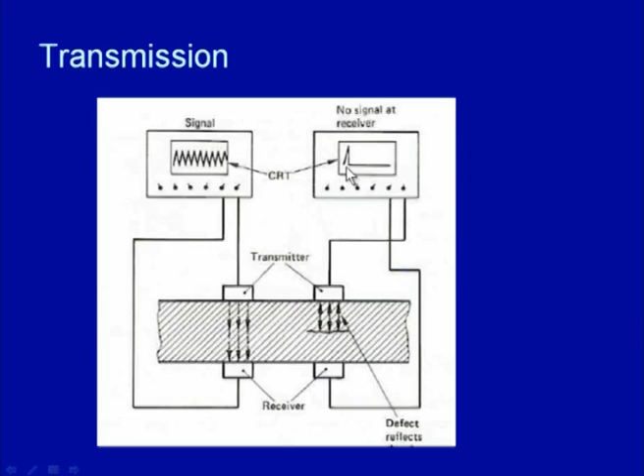So, no vibrations will be received at the receiving end. The receiving end will not give any signal in the oscilloscope, and it will be getting just one peak, and no other peak is observed. This suggests that some sort of big defect is present in the component.

The reflection method works on the simple principle that the same transducer works as a transmitter and receiver. First it transmits the signal, and if there is no defect, this will be sent back from the other side of the metal and will be getting another peak.

But if there is some internal defect, it will be reflected back from in between and we will get some intermediate peak. The first peak and last peak indicate the peaks coming from the top surface and the bottom surface, but the moment we get an intermediate peak, that will indicate some internal discontinuity is present, and the location of this intermediate peak will indicate the location of the defect between the top and bottom surface.

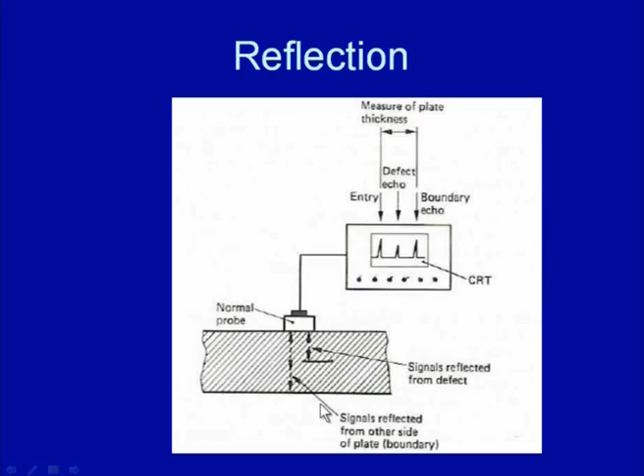This corresponds to the top surface peak and this to the bottom surface peak. So, the relative distance between the top and bottom surface can be calibrated to see exactly where the defect is present. This is how the ultrasonic test is conducted.

Now, for conducting the UT test on the weld joint, a very specific pattern of movement is done. Here we are using either a 45° or 60° probe for conducting the ultrasonic test, and depending on the type of probe being used, it will be directing the vibrations at a certain angle.

So, these will be transmitted, and on transmission it will be reflected back first from the bottom surface, then reflected back from the other side. So, this kind of movement is done. For this location of the probe, this area will be scanned, and for this other location, this area will be scanned.

So, if we are oscillating the probe between the two, then the entire weld zone will be scanned. If we want to scan the complete length of the weld, two lines are drawn in such a way that the entire width and the whole weld joint throughout the length is scanned, so the probe can be oscillated or moved between these two lines.

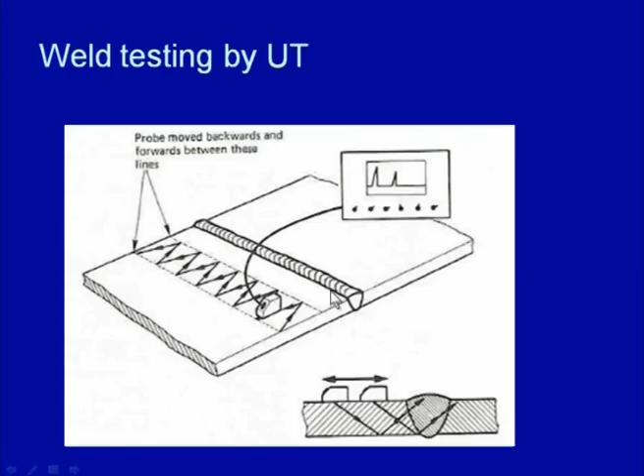So, depending upon the type of probe being used, the location of these lines will be affected away from the weld zone. So, this is how we have completed this non-destructive test, and we have covered the 4 types of non-destructive test.

As a summary of this presentation, I have talked about both destructive and non-destructive tests. The very specialized destructive tests like the fatigue test, impact test and fracture toughness test were discussed. And in the non-destructive tests, the commercially used tests like the ultrasonic test, radiographic test, magnetic particle test and dye penetrant test were covered.

Now, the last lecture based on this 40 lecture series will start from the next presentation, and that will be based on the weldability of metal systems. Approximately 4 presentations will be given on the weldability of metals, starting from the next presentation. Thank you for your attention.